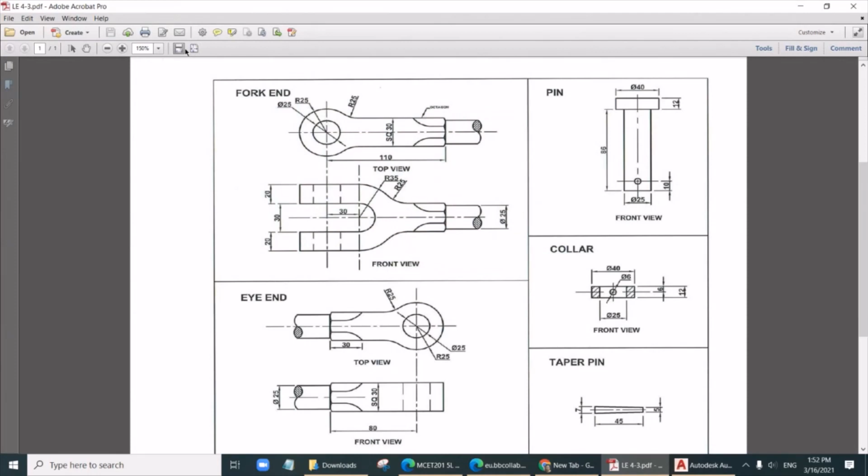And the outside one is radius 25. Then you can see this is going on up to 110 length. I will show here because maybe that is too small for you to see. 110 from this to this is 110. I will not draw that octagonal part, but just a rectangle for now.

So offset by 110 from this to here. And then this is 30. So offset by 15 from this line. 15, 15, total is 30.

And they said offset by 110. I didn't get it, it's up to here. This is 110, you can see. So I can draw this line. I can delete the construction line for now, or we can maybe keep it here. Fine, it's like this. Here is trim.

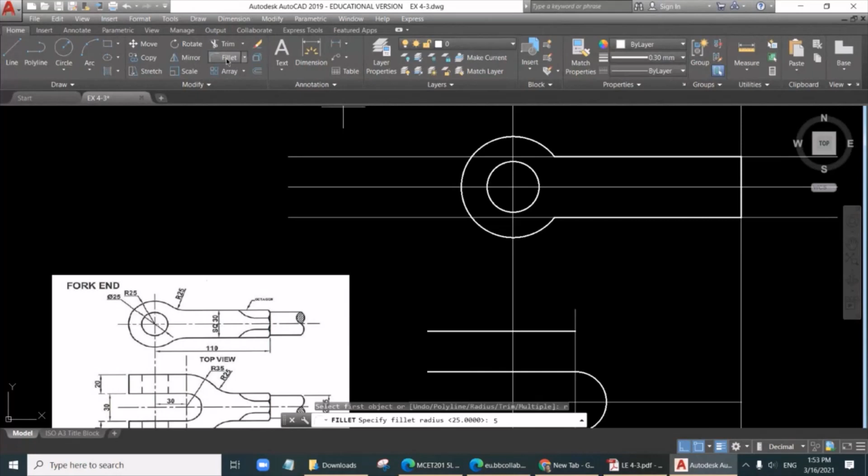Here is a fillet, R25, between this arc, this 25 line, here.

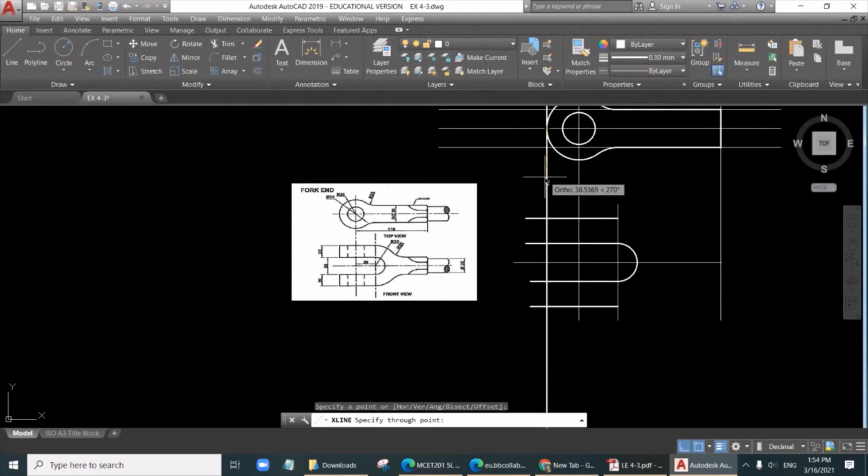Now, how long is this end here? It is coming from this circle, so I can get the construction line from this circle. You can see, so these lines, they are only up to here, only up to here. I'll delete this. You can trim again the excess length, this can be trimmed here.

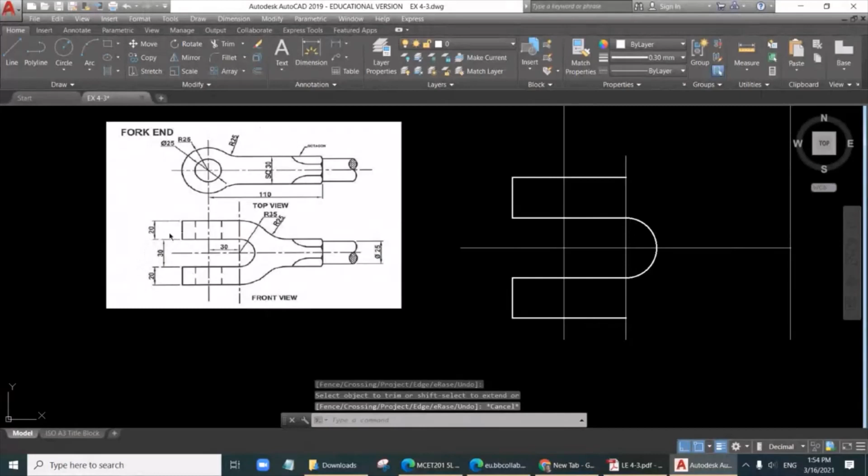Now the other remaining part here on this side, this is radius 35, the outer radius. So with the same circle, center radius, this center, this is radius up to here. Again trim it and delete this part of the line.

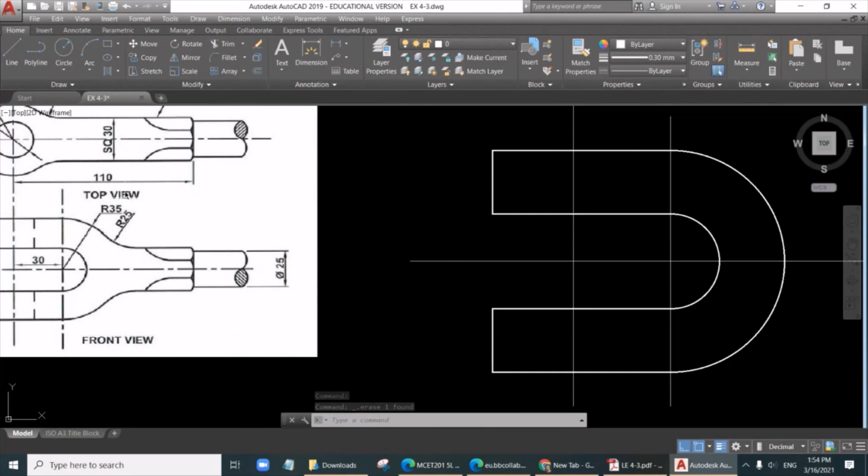It continues as a 30. This is square 30 and this is 30. Also here is 30. Okay, that is to be understood. So I'll say offset by 15 on each side from this line, 15, 15. So now you can draw a line from here to here to here to here and trim

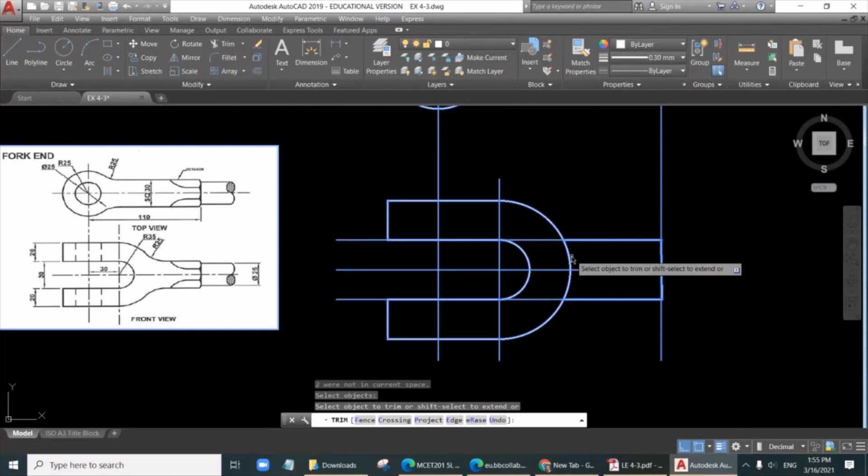this line here. I'm trimming it first. Oh, this line is not properly drawn. Let me do it again. Okay. This is okay. Fine. Okay.

This is fillet again, fillet R25 between this and this. Right click, repeat fillet down here. You can delete this. So you can see this is done.

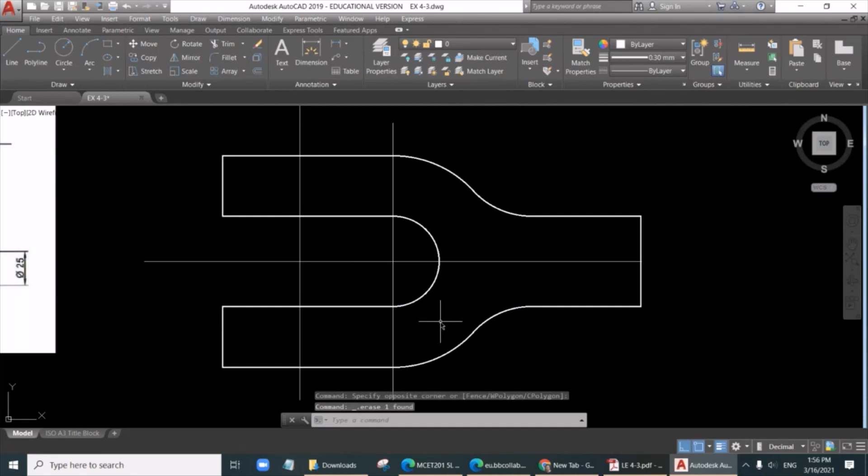Now this length, we can assume any suitable value for the length, but the diameter for that shaft is 25 diameter. So you can continue from here, say drawing the line, say the length is 30, any length, assuming, and diameter is 25, any each side 12.5

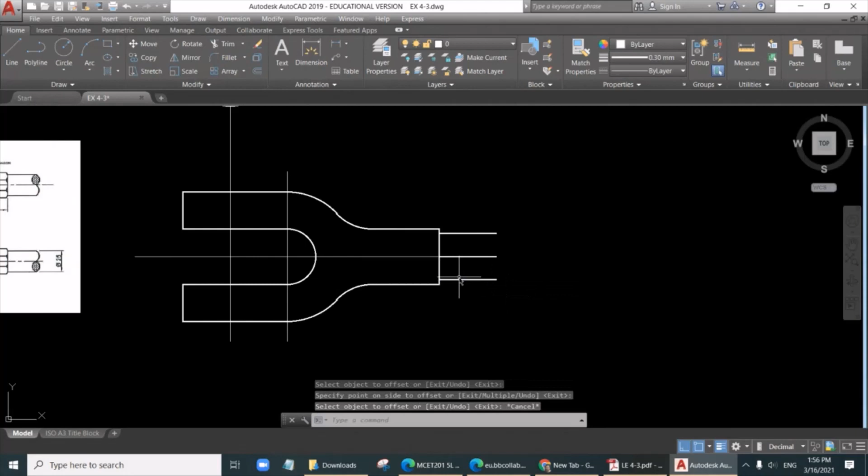offset from here. We get the shaft, and we want to draw the arc here like this. Switch off the ortho for a while. We have done it from week number 2.

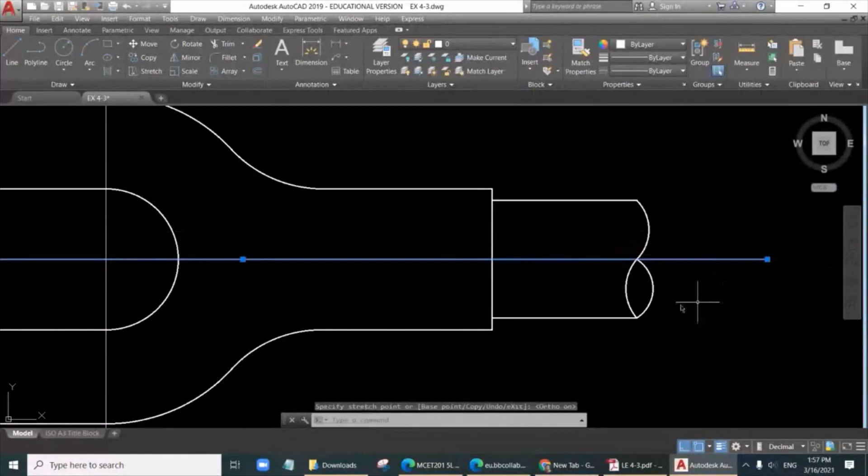Fine, this line can be deleted now. You can continue this. Okay, as a center line, ortho on. So when you extend the lines, ortho must be on.

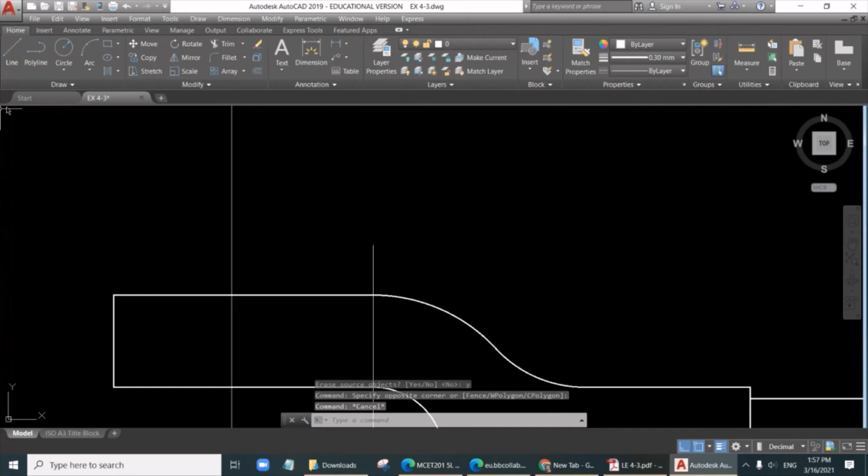I made it like this by mirror command, and I will need the line here. Sorry. To here.

Fine, this part is done. We will think about this octagonal part later on. No need to worry about this.

Now we'll put the fork end into this part. Sorry, the eye end into this.

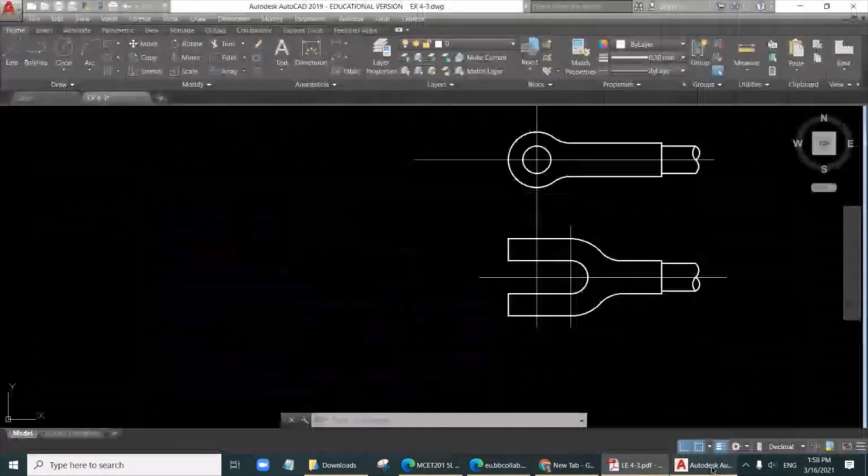Let me draw this part. This is 30 and 80 from the center. This is a main center. From this center it is 80. Offset 80 from here.

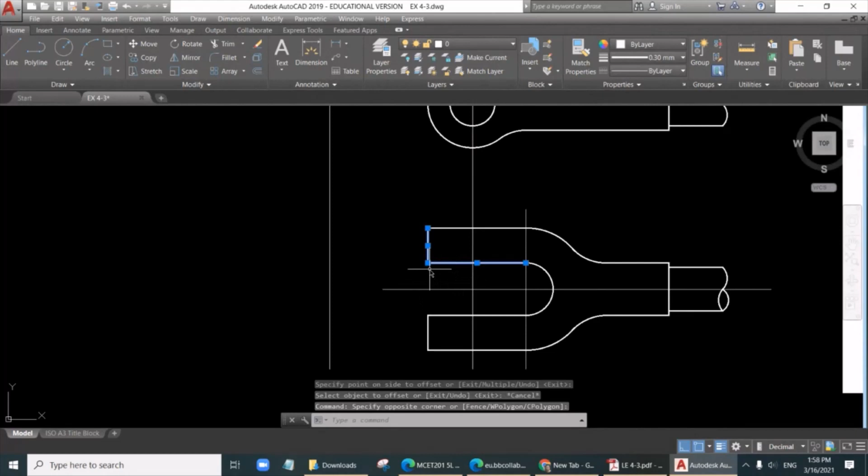This part, and you can actually extend the same line up to here, because it is the same size, 30. You don't have to draw another line, but either you trim it or extend it, or just pull the lines with ortho and Osnap on. It's up to here.

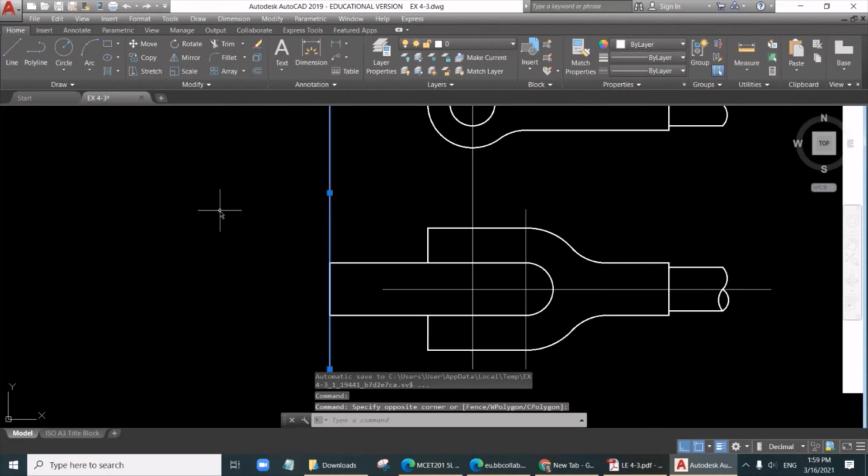Fine, now okay, we need it in the top view also. How much is it on this side from the center line? It is 25, radius 25, and this distance is 25 up to here.

So from this main center here, on the right hand side, 25. So yeah, it's up to here. Okay, sorry, set 25 here, up to here. You can delete this line now. It's up to here. Then we have this hidden line here for the pin, but we can directly draw the

pin there. Now same thing in the top view, the same part in the top view we have to draw.

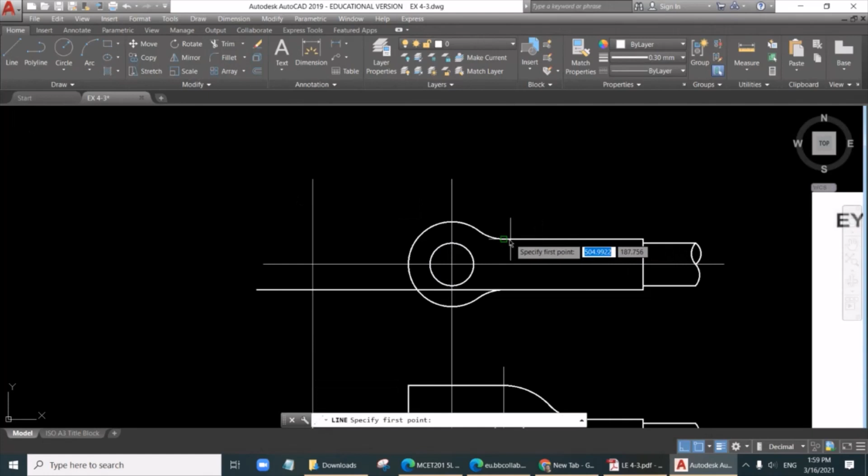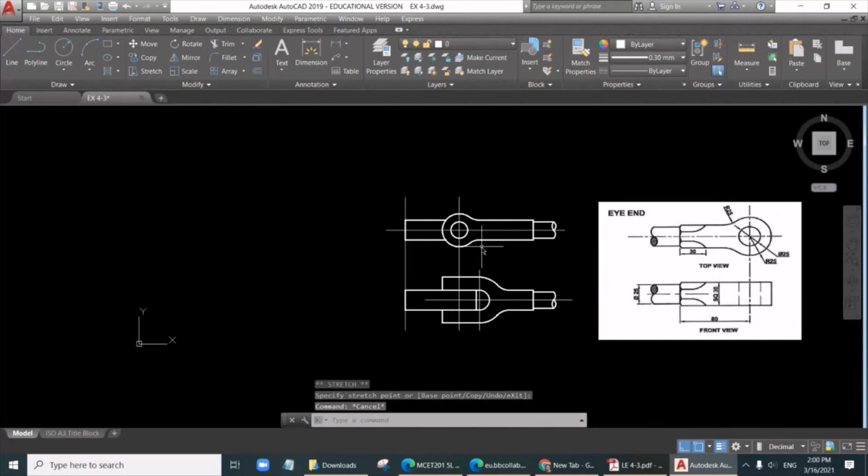So for that, I can draw a line from here. It's very simple, it's the same line because it's the same line, 30, it's up to here. I can draw the line and trim it or just pull it back here, and this also can go back here. It's on this side, and then there is another circle here.

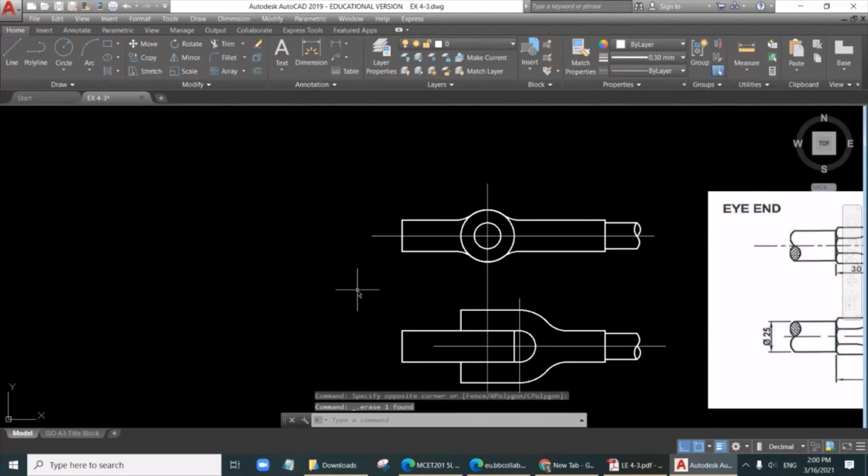Now I will make a fillet here, fillet R25 between this and this, repeat fillet between this and this. Well, this can be deleted now. We have this end.

Let's look at the main part drawing here. This part is section lines up in the front view, section lines up. So I can copy this, make a mirror, vertical mirror of this, instead of drawing it again.

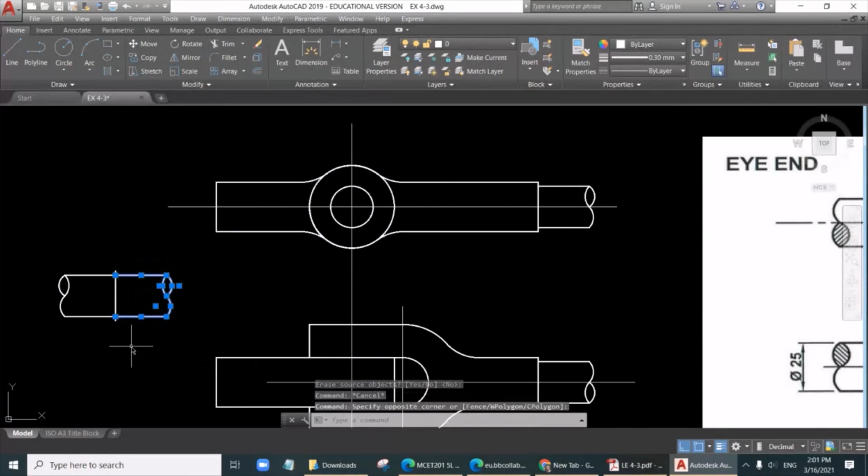And I said don't delete, so that was wrong. Then I make it move. Move it here. We have two lines. I'll delete one line.

Continuous center line up here. We can add the hatching lines by then. And whereas here, if you see in the top view, the lower part is having section lines. So the lower part is having section line in the top view.

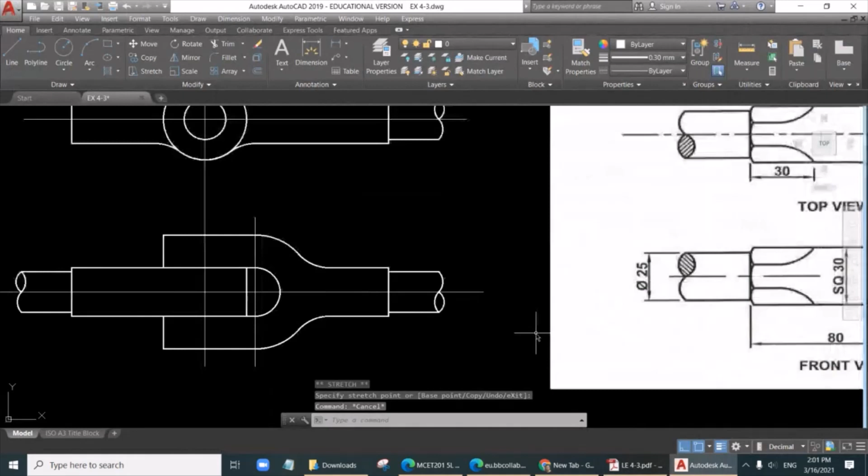So I can copy this one here for the top view, make it a mirror image of this, and say yes, delete the original part. Move it, keep it here. Fine, two lines.

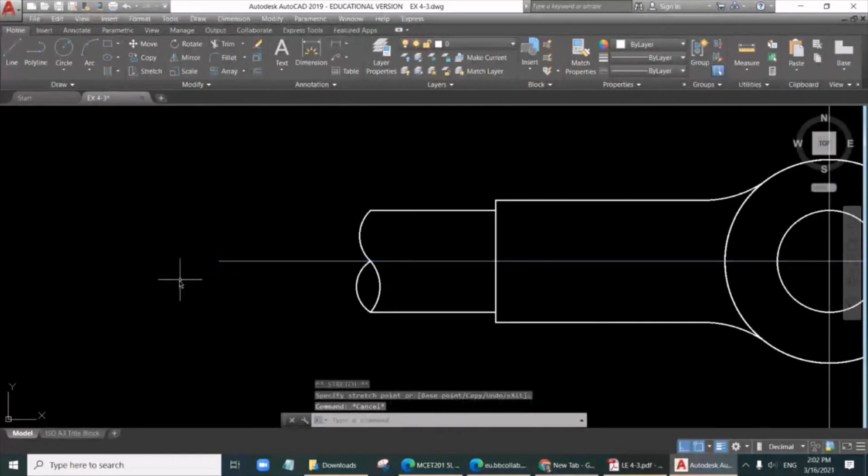Never keep double lines anywhere, because it leads to other errors. Fine, so that is done. The two parts are done, two parts are done so far. These are our center lines. We can make them center lines, these are the center lines.

We need a few more things here. Let's focus on the pin now. This is the pin which is going there. I'm not showing you the solution or the shape of this knuckle joint, because I said we need to draw the unknown part, as if we don't know this part, and draw it.

Okay, so this is diameter 25. That means this pin is going through this hole, so I'll draw that pin and it is resting here. Starting from here, 20 on this side, 12 going up, 40 like this, coming down by 12. This is the pin, and I can delete this line, no need. Fine, this is the head of the pin.

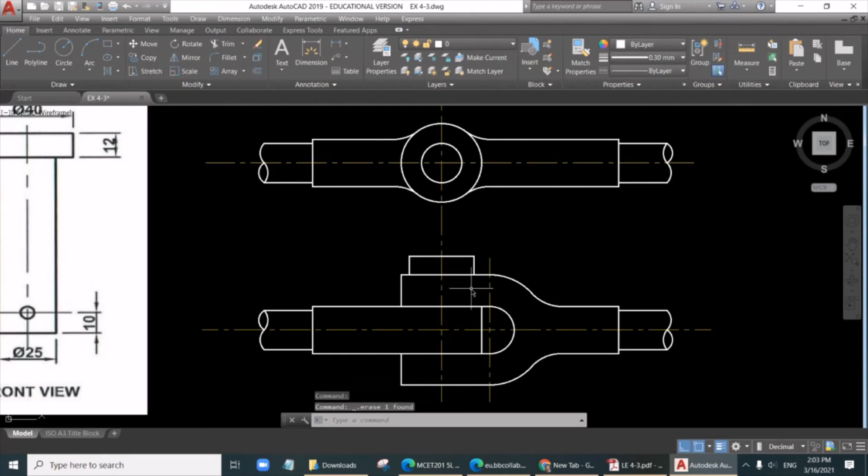40 by 12, this is 40, this is 12. And from the center, this is 86 - they are saying the length of the pin. From the center line, I will draw the line from here. 86 is the length of the line. This is 86, I draw the line.

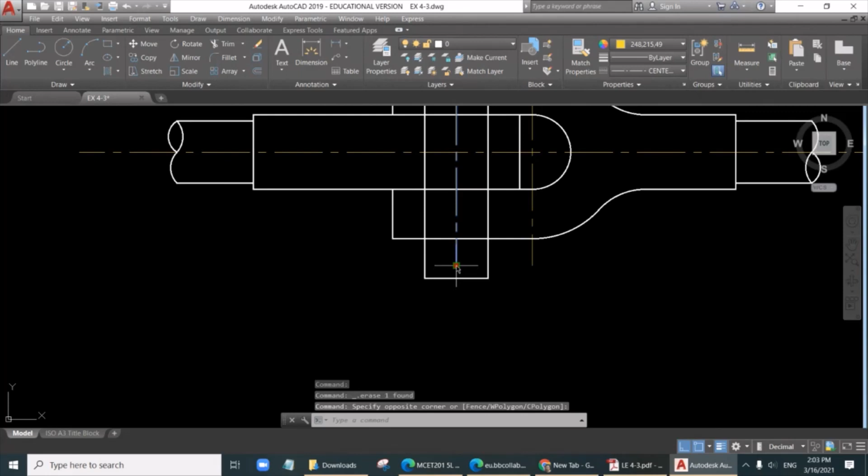Offset it by 12.5 - 25 is the diameter of the pin. So offset by, sorry, my number 2 key is not working properly, 12.5 from here, and the end of the line, end of the pin is here. This can be deleted, the center line can be extended. Now this pin has a hole, 10 from the bottom - offset by 10 from the bottom is here. This is the center of the hole.

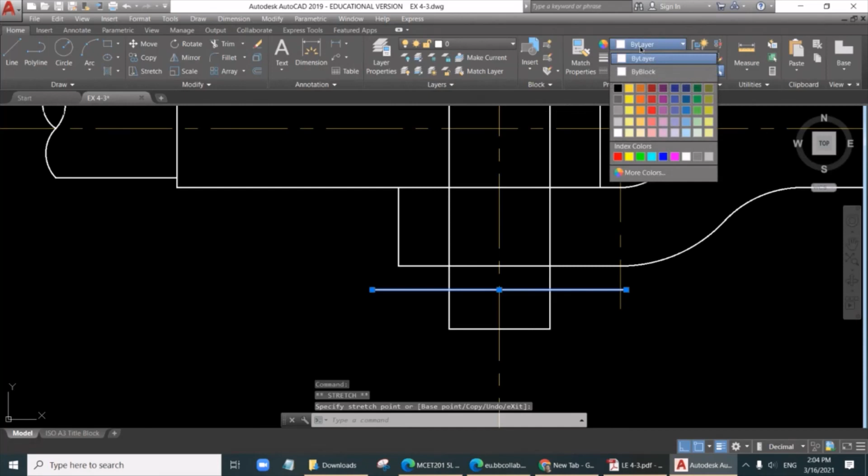This is the center line. I can reduce the length of this center line.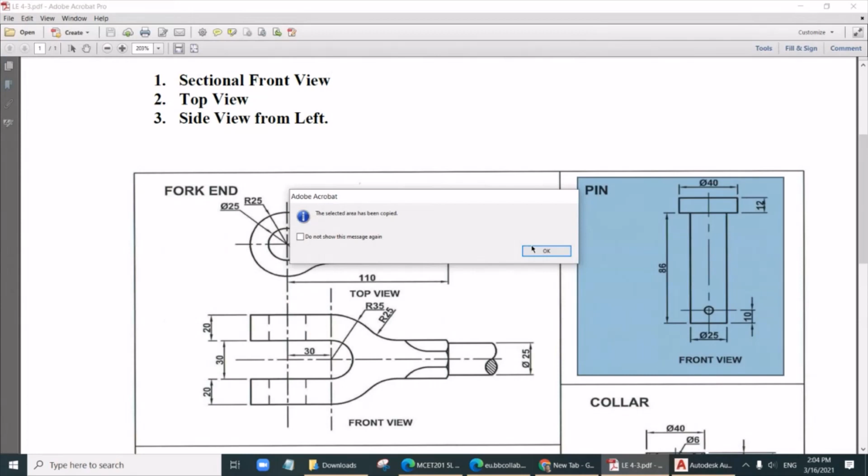They want us to draw a sectional front view, so this front view is a sectional. We want to see what is inside the part, and we will take a partial section here. So to draw the partial section - what is a partial section? We take the sectional view of only the area of the part we are interested to show the section lines. We don't section the full part, we don't cut the part fully, but we just want to see this pin in section.

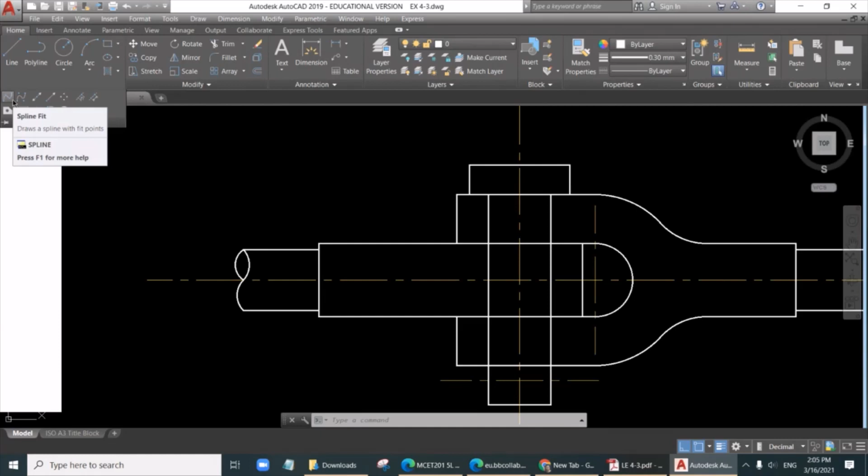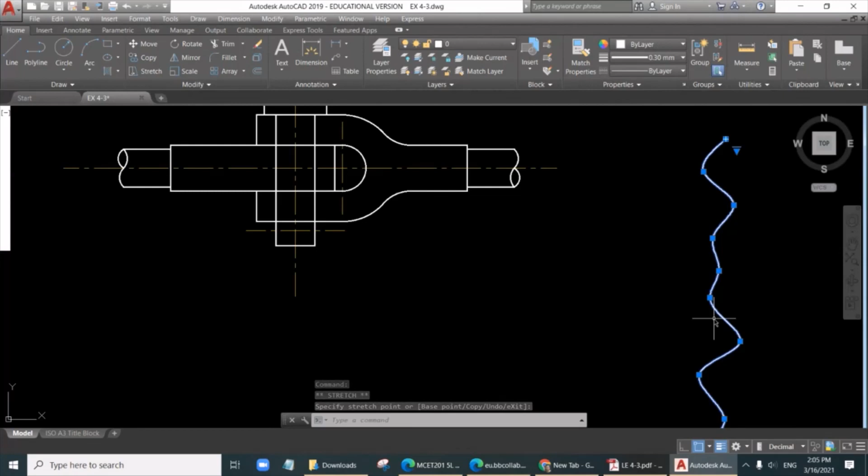So there is this spline command, spline fit - this is a spline, or the spline CV, it doesn't matter, spline command. What is it? You click here, you switch off the ortho for a while like this, you can define the shape of the spline by clicking wherever you want. Enter, enter, enter 3 times at the end to end the command. You can change the shape even later on if you don't like it. So we'll use this command, spline, to take the spline here, and maybe...

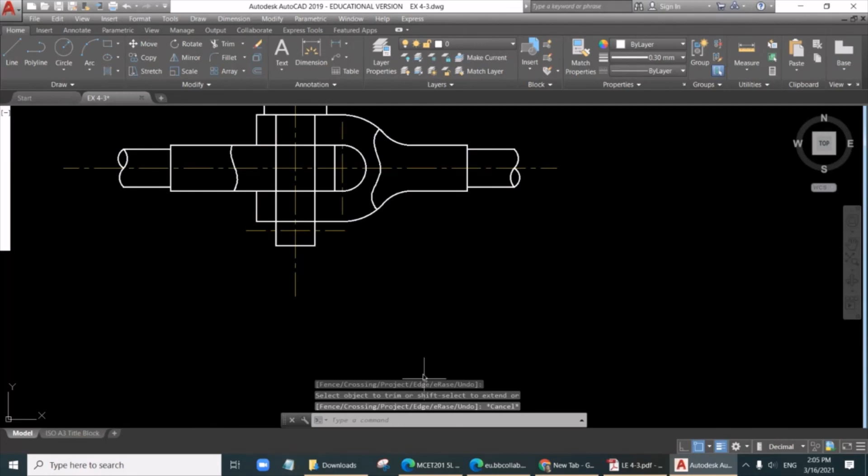Say somewhere here, okay, and I will trim that spline also. Trim. We are taking the partial sectional view here. So basically we want to take the sectional only in this area. So hatching lines ANSI31.

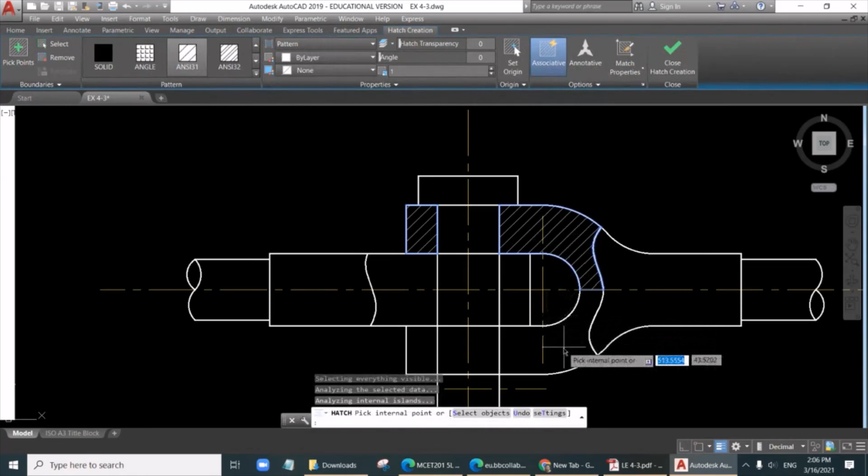Okay, let me go here, by layer, and maybe this hatching line here. This is one hatching line, and in this part another hatching line, but this hatching line should have a different angle because this is a different part.

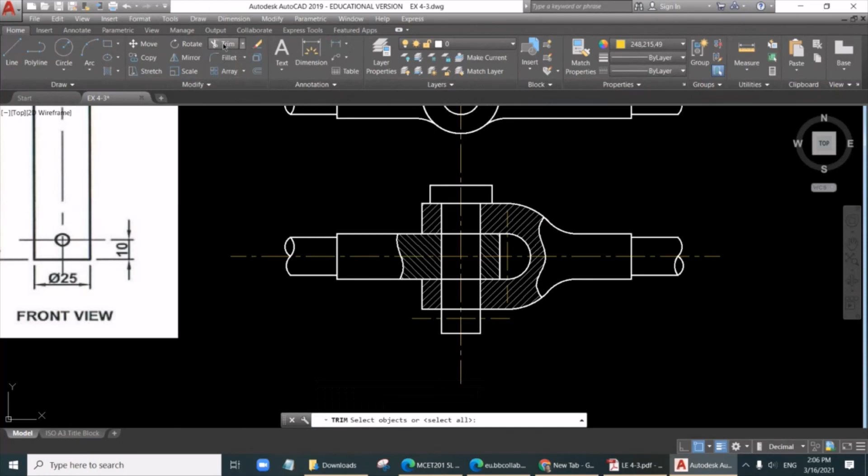We show the hatching line, but now because we are showing this pin in the section, now we are seeing the pin. We can see the pin now because of the hatching, so we have to trim certain lines here, like this line. These are just small modifications that will happen to the part because of the sectioning. You are taking the section, that means you are cutting the upper part, and now you can see the pin directly. You are seeing the pin directly here.

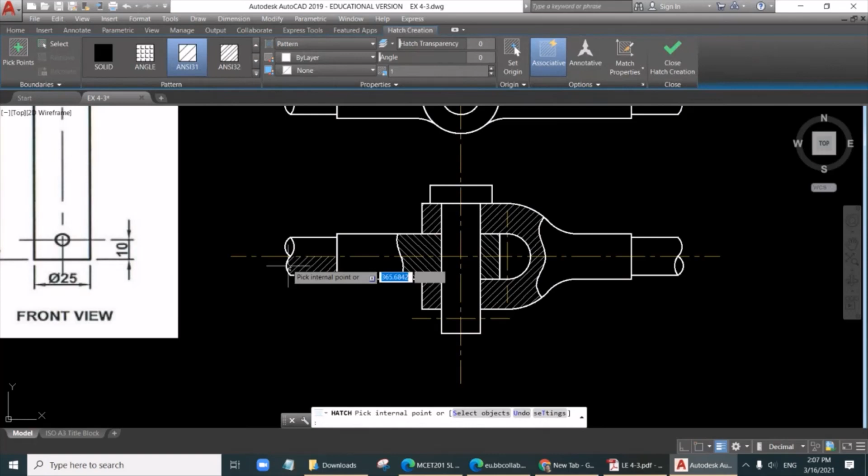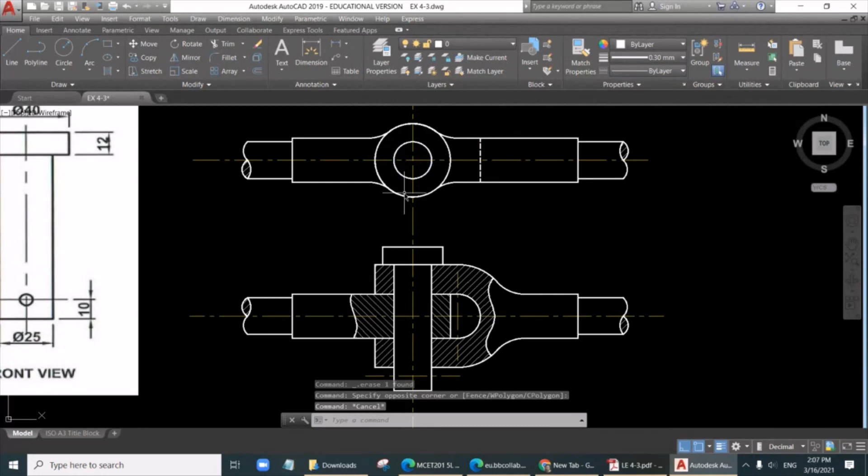That's it. Because we are in the hatching command, we can in this also. Okay, these are different parts, so they should have different hatching lines, but doesn't matter. Fine. So far top view, front view is done, but you can see here some modifications are needed for some additional details, like here in the top view there will be a hidden line here. For this surface or this part of the fork end, this will be a hidden line. Fine, we'll talk about this and the hexagonal part later on.

Now let's get the side view. What you see in the side view. Now before we go to the side view, let's understand. Intentionally I didn't do it before, the knuckle joint. You go to the images, just type knuckle joint, you understand what is the part. See, this is knuckle joint and it is a commonly used part. I hope we get a good image. I'm just doing a random search so that you get a better understanding.

See, this is a fork end. It looks like a fork end because in the top view it looks like an eye. You put this in here in this gap, put the pin, then put the collar and insert the taper pin. So if you see from the side view, you see the circle for the shaft, then you see the octagon, this is octagonal shape. Then this octagon merges, it becomes square here. You can see it is a square, 30 by 30 square here.

Also for this, it is a square in that area, a small neck area. After the octagon, it is also square. And then the height is remaining the same, 30, but the width is changing. Width is coming 25 radius for this and width is 50. So here 30 square and here 30 height, 50 width rectangle in the side view. Let's get here to start drawing the side view. I hope we got a fair idea about the shape now, the shape which we are drawing.

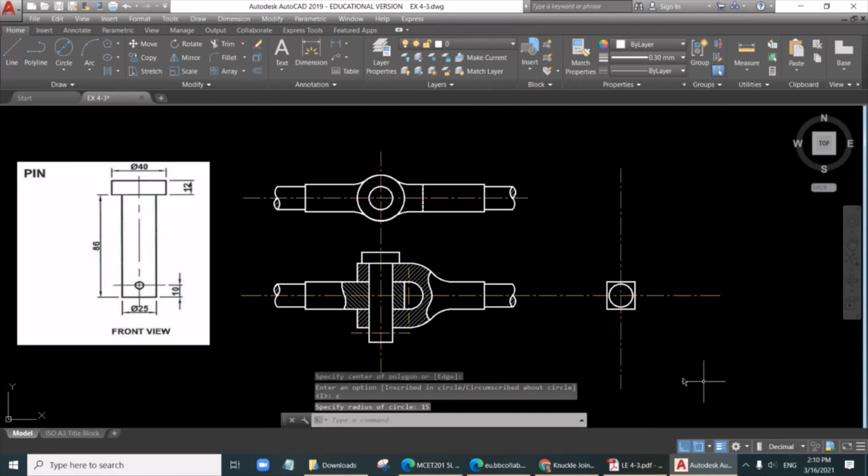Okay, I'll delete this and copy paste the center line. I said we have this diameter first, diameter 25 shaft. And then we have this one, this is a square. So you can use polygon, number of sides is 4, center of the polygon, C, 15 radius. This is a square, 30 by 30 square. You can see this is a 25 diameter, 30 by 30 square.

This square also has an octagon in the same place. So you can use the polygon command again, number of sides 8, specify the center for the octagon, C, 15 radius. This is a square. You can see from the same square you cut the corners to become octagon. Because you are cutting 4 corners of the square shape, you get an octagonal shape. It becomes octagonal. This is done.

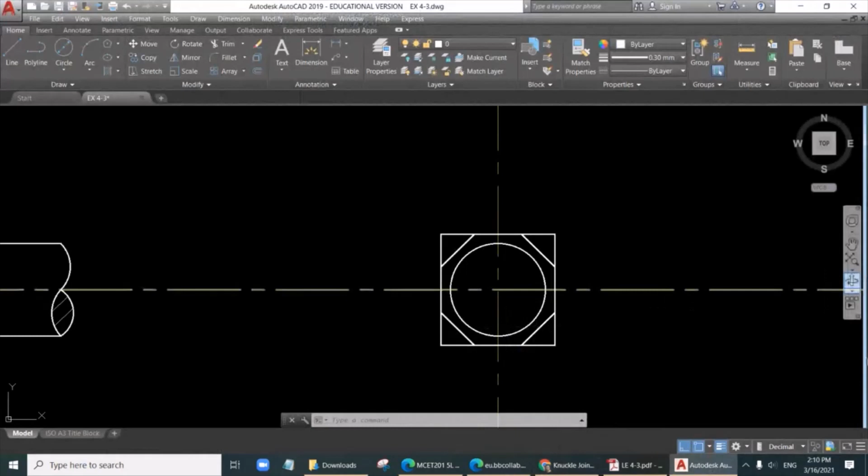But in this area, this same eye end is increasing in the width. You can see again, I will go back to this. This here is increasing in the width. How much is the width? Radius 25 on one side, so radius 25 on the other side, that is 50 width. So I will draw the line directly from here. Okay, anywhere you can draw, starting from the middle. 50. This is line 50.

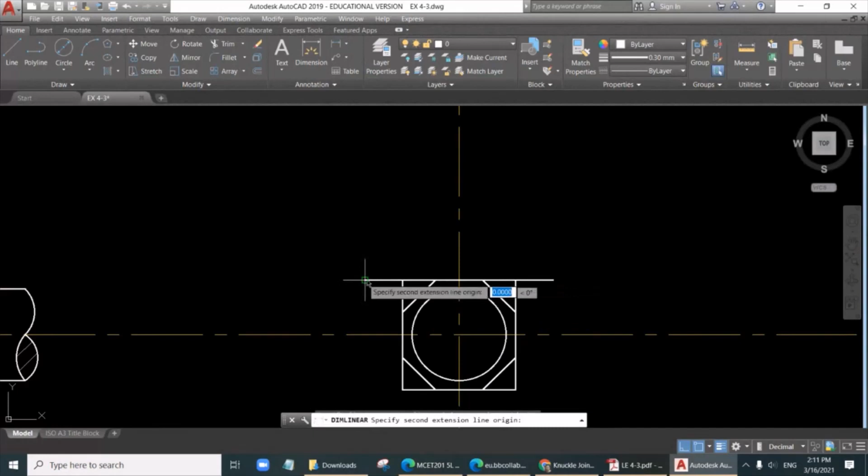Then I go to the center, check the dimension again. This is 50 because 25 is radius on one side. You can see here, this is coming from the top view. This is coming from here. So this size is 25, that's why the diameter 50. Fine. So offset this by 30 to get the line down here. Offset this by 20 up from here and 20 down from here. This is 20. Okay, I think it is not 20.

Offset by 20 from here. So now I can draw the line. Now this part is the eye end. This 20 is for this part, 20 up here, from here and here.

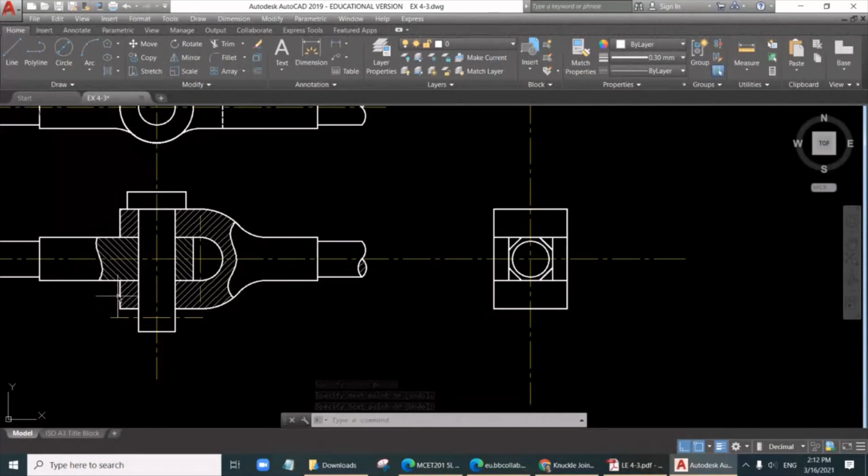This also is having the same width. You can see here both circles are matching, so it also is having the same width, 50 for this fork end. And then we can put the pin here, this pin. It's not selected well.

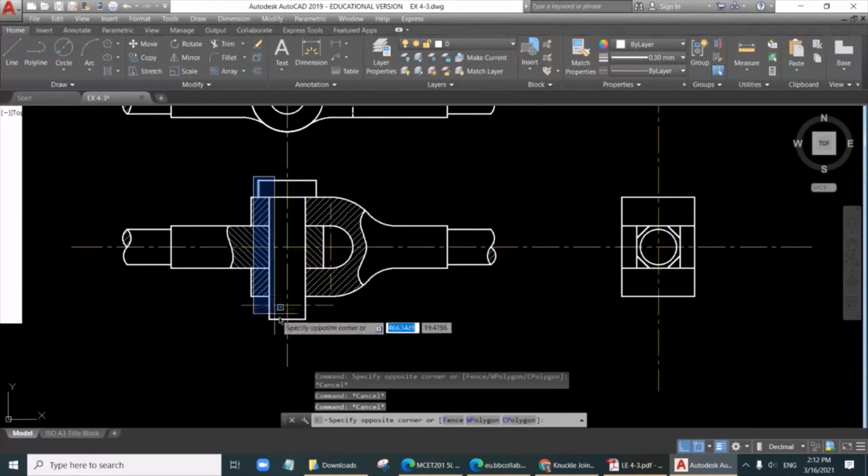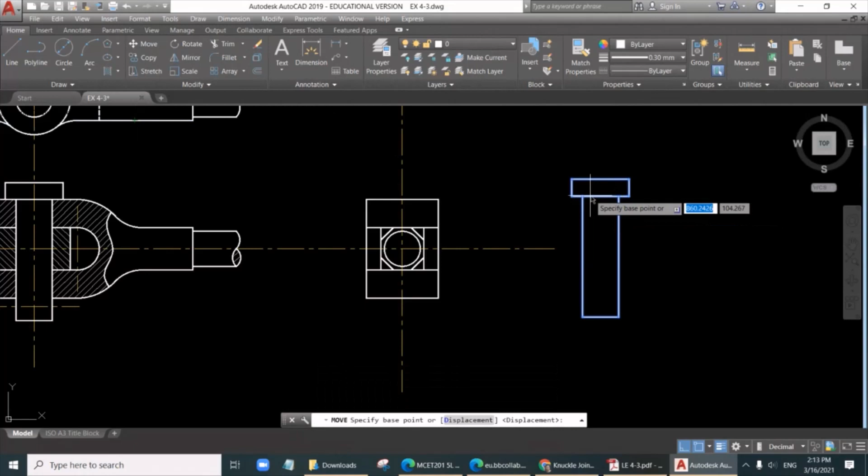Copy paste. I'll put this pin here because I need some reference point for the move command. So I will move this, move the midpoint here to this mid, not correct. Move the midpoint to midpoint here. Fine.

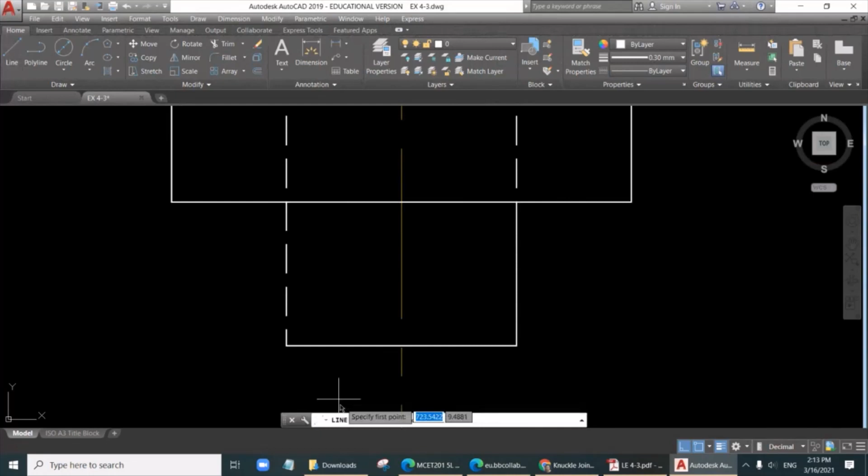Side view. So the pin here inside will be hidden. This pin inside here should be hidden. But the outside part of the pin can be visible. So you can draw a visible line here. This is coming out. So for now, we'll draw a visible line.

And again, we don't want line over line. If it is there, it also doesn't matter. Fine. Outside is visible. Inside is hidden. This is a pin. Now almost everything is done. Let's focus on the two small parts here now.

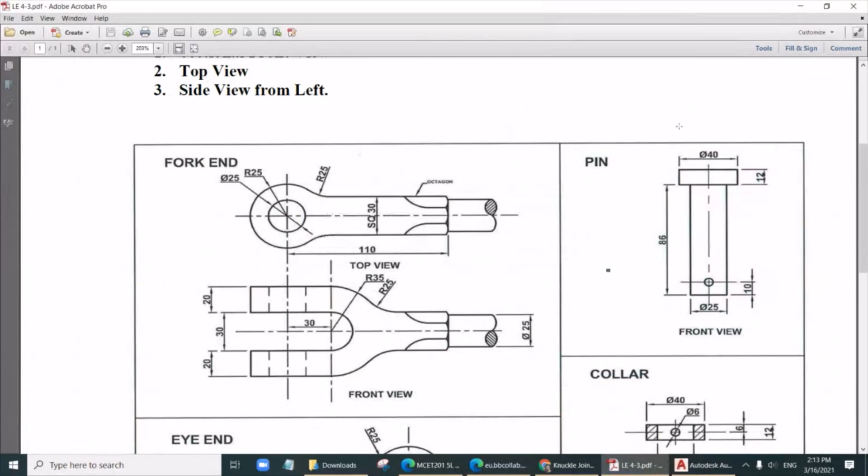This collar is the same dimension as this head of the pin, 40 by 12. You can see the collar again here. This is a collar, same like here. Dimensions are the same for us. This collar we have to put. We have to match the center of the collar with this center. Fine. So if I want to draw the collar here,

you'll see that 40 diameter. Fine. Let me just draw the line 40 here. This is a collar. Go to the middle, offset by 6. Actually, the upper line is not needed because the total size is 12. Fine. This will be deleted. And this is the collar here. Sorry.

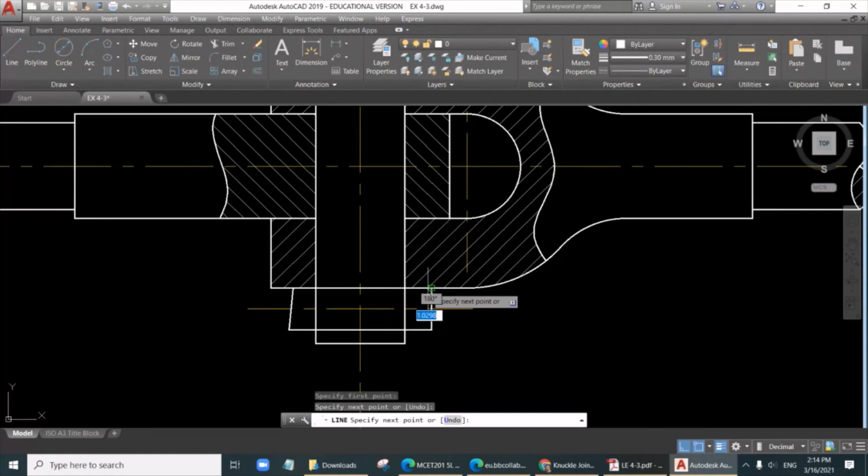Same. You can draw the collar here. I can directly make offset by 12 from this. Sorry, 12 means offset by 12. Here, and this should be 40. This total is 50 now. I want to make it 40. Keep that line. Delete this line. This is a line of 40 size.

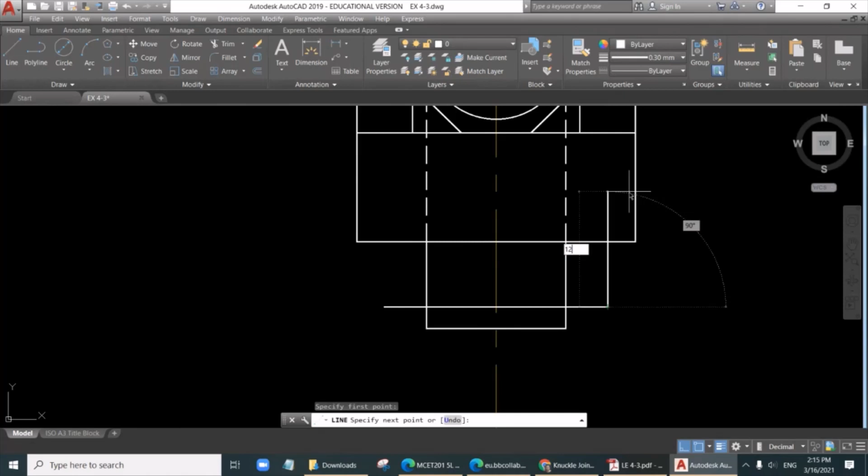Get back here. Draw the line from here up by 12. From here up by 12. Fine. This collar is done. You have this center line. You can bring the center line here. The collar also is done because this is a sectional view and we have this center diameter here. They are saying it is 6 diameter.

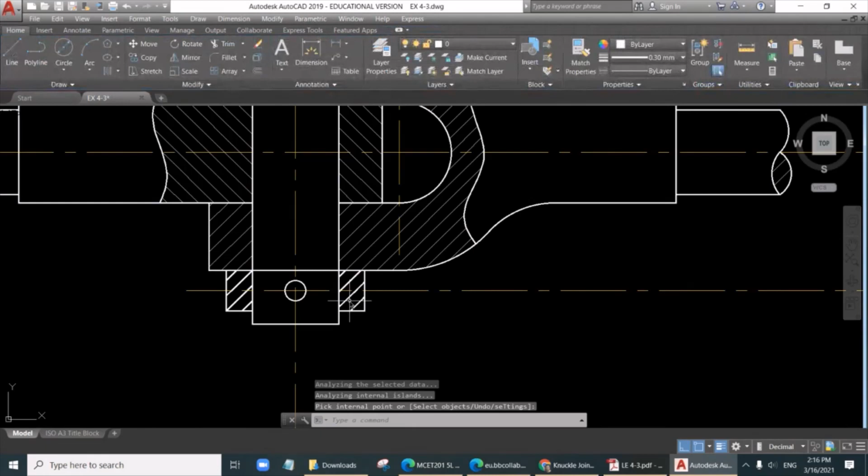Okay, and we are taking this as a sectional view, so we have to again trim this line. Trim this line here for the collar because it is a sectional view and it is not trimmed. Pull it back and add the section lines here. And this should be another angle. You can also change the scale.

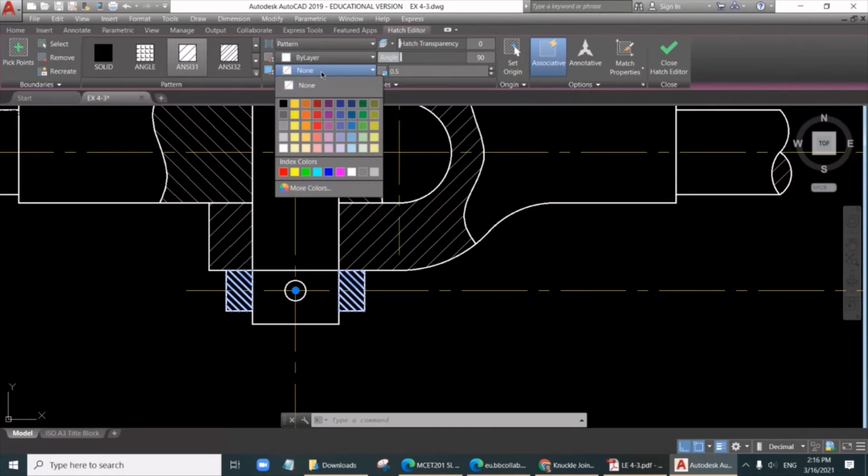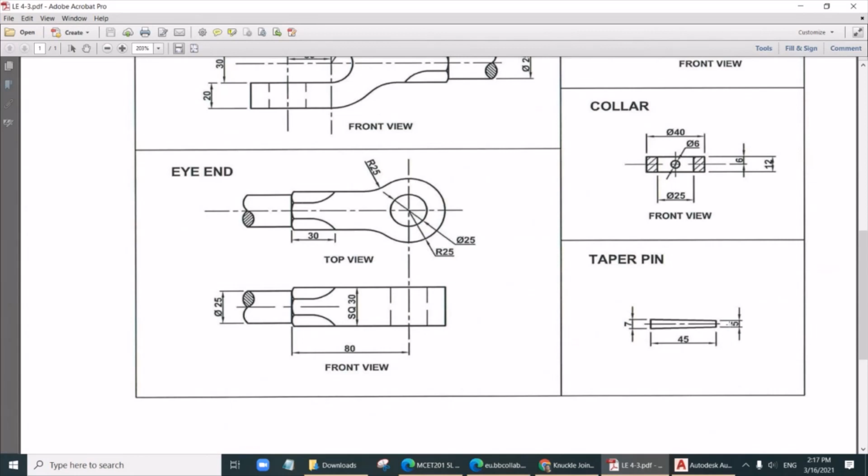Fine. Now we'll talk about this small pin. Taper pin, you can see this is diameter 6 here, and this is a taper pin, diameter 7 here, diameter 5 here, length is 45. Cylindrical taper pin like a white chalk. Tapered pin, 7 here, 45 length, 5 here. You can easily construct it first and then put it where you want to put it.

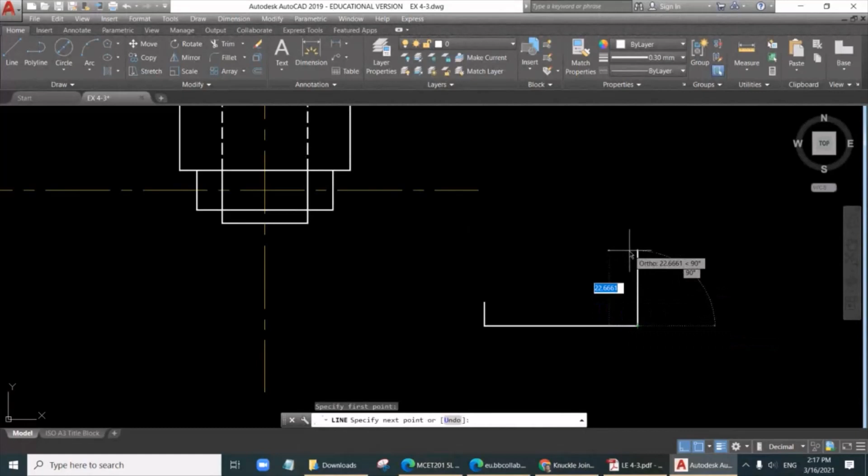I'll draw this just 45 length like this. Then from this, I'll draw a short line of 7 length, another short line of length 5, then bring the center to here, bring the center of this one to here, draw the line from this to this.

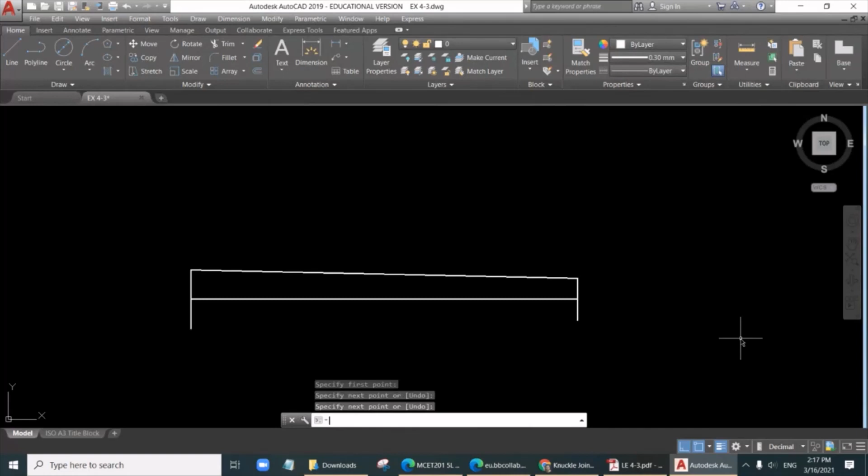Hello, engineer. Yeah, I'm in the class, so can we talk later? Okay, when I finish, I will call you back.

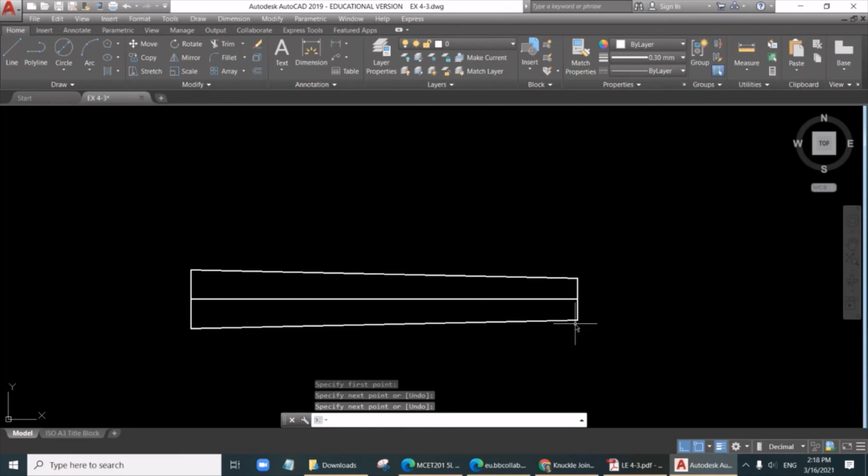Well, so now this is a pin which we have drawn. Now this pin, I will put it here in that hole. Okay, so let's understand something. This hole position here is like this, from the front view you can see. So the pin is like this. If you see from the side, the pin looks like a rectangle. And if you see from the front view, the pin looks like a circle. Understand that. Same position we will follow.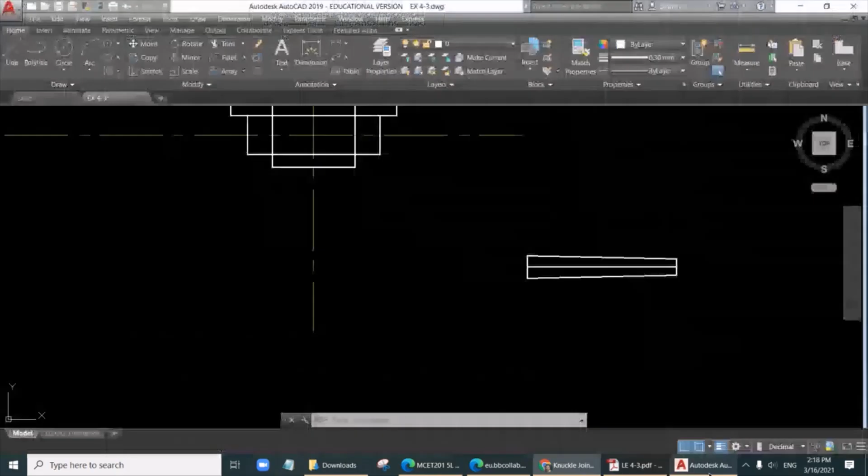It can be changed because it is an interchangeable position. Logically it won't be any mistake, but we will draw the same thing. So I'll put the pin here. We put the pin here, that means here it is only a circle. If you see from the front, here it is like a side, from the side. Again, the pin inside the collar will be hidden.

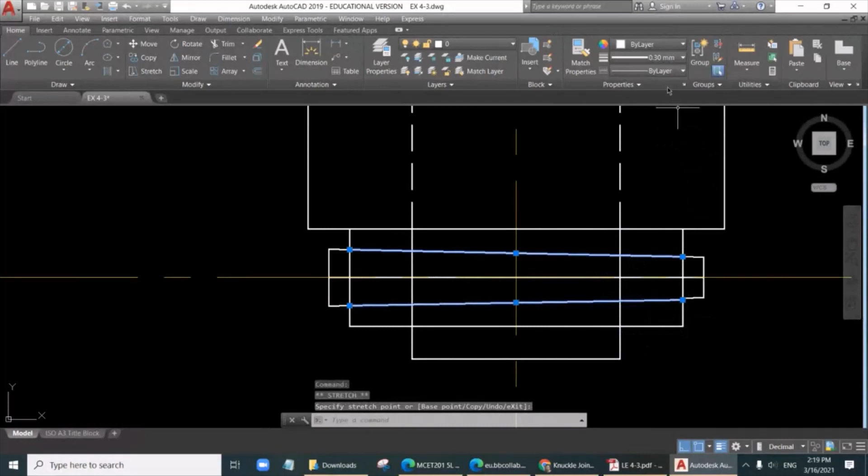So I just cut it into two items or two elements, and then I can make this here to here, and you can see here the same part, but the only thing I want is to make the inside one a hidden line. This is a hidden line. This pin now, even here inside, you can see in the collar also, before I just put something logical, here also this is hidden. This pin inside the collar is hidden. So this hidden line can continue up to here now.

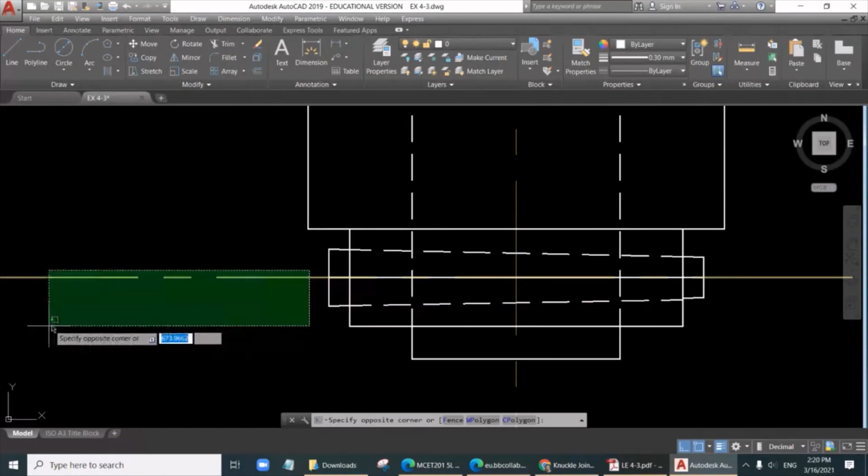Right. So outside is visible. This is a collar, this is a pin inside. You can delete this line. Okay, keep it for now. Keep it for now, I guess. This pin, I'll put it here, a copy of the pin. You can delete this. This pin you also need here in the top view, right? Same way. So I'll rotate the pin, rotate by 90°, then move the pin

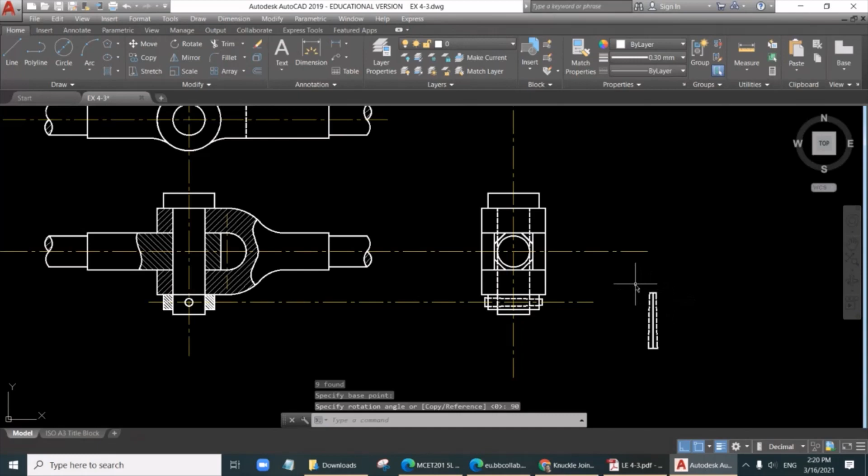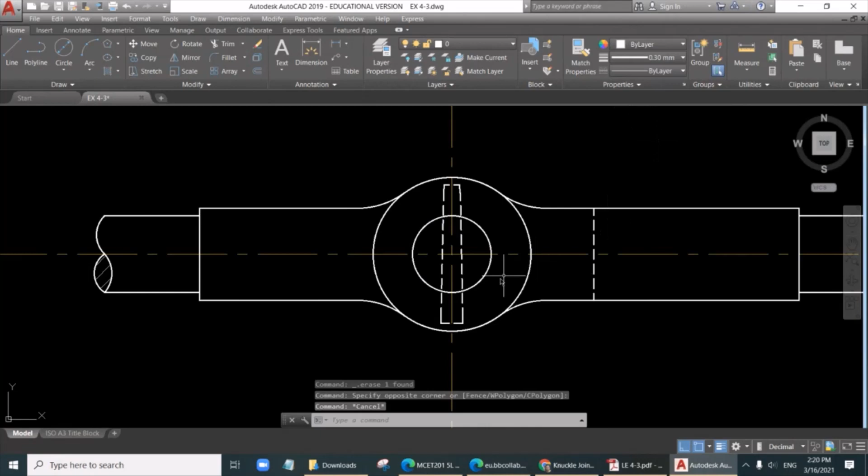here. And now in this case, the whole pin is hidden. In the top view, the whole pin is hidden. I convert all the lines together. It doesn't make much difference. Even this circle here is hidden because it is a hidden hole. What you see now in the top view is this 40 diameter circle, from this center, diameter 40. This is a visible circle. This hole is hidden. The pin is hidden. Here everything is done.

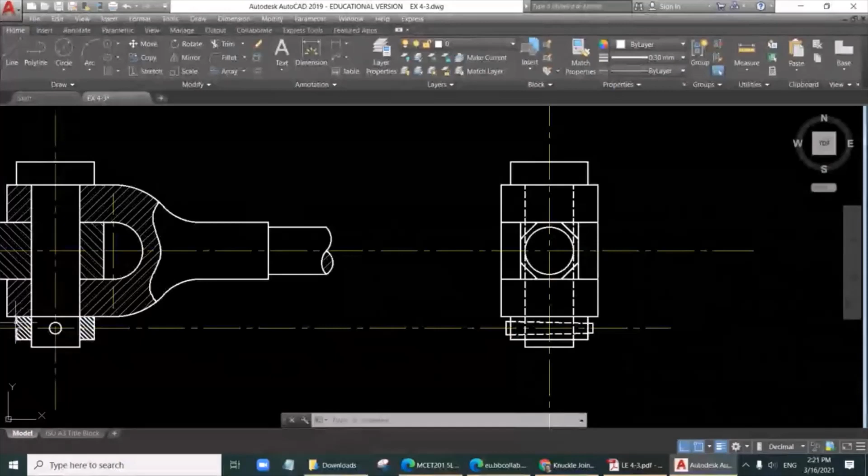Only one part is remaining, that is the construction of the octagonal shape here. They are not giving how much is the length of this part. Yeah, it is specified here 30, and here not specified. We assume 30 only. But how much is the arc size? So how to draw that part? It will be done from the side view, because to draw that, first we need to complete the side view. We got the side view now. We can draw that part because it is coming from the projection of the octagon.

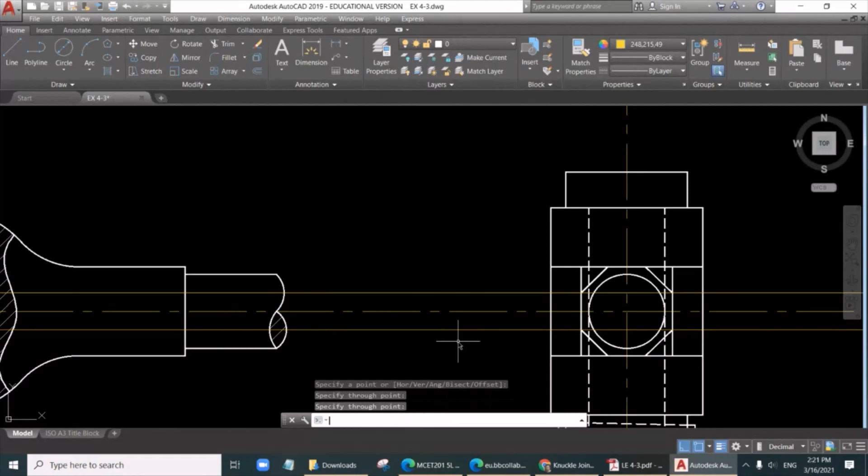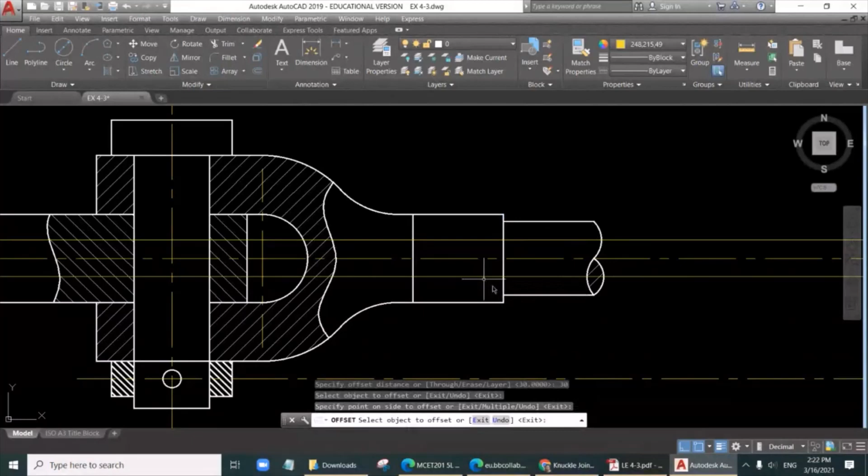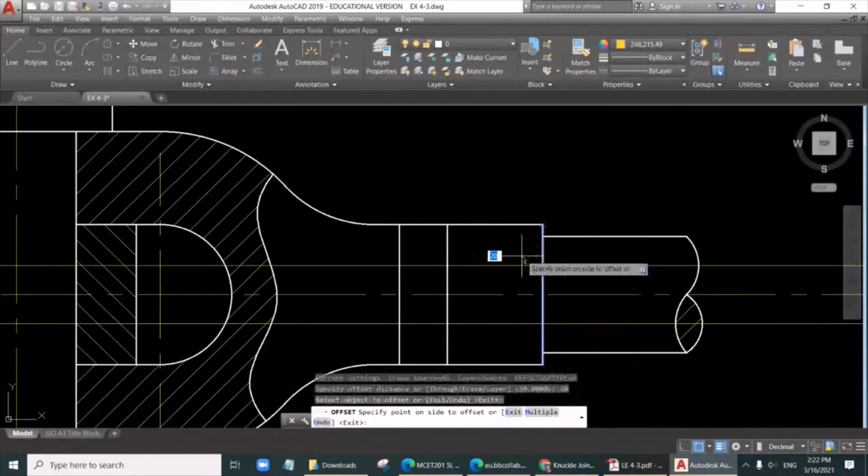It is from here. 30 size. Okay, offset by 30 from this. No, 30 is not entered, I guess. Offset by 30. I will just show one, and you can just copy and paste it to other places. How much it is straight, how much it is curved, is also not known. So I'll just draw a freehand arc starting from here to somewhere here. I will make it an offset of 20 from here, approximately. So I am assuming up to 20 it is straight, and then it is an arc.

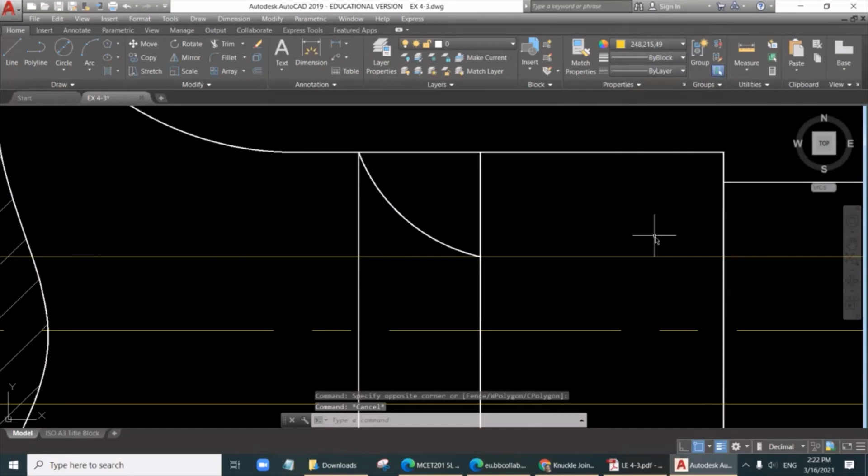Also, how much is this? This is the space which we draw by a 30-degree angle. We don't have to draw a 30-degree angle. You can assume a suitable value, say 1.5 millimeters from here. Okay, assume it. Even if you don't draw this, it is okay. This one here, same thing, you can mirror it. Mirror this arc. Also draw this arc here, the middle one.

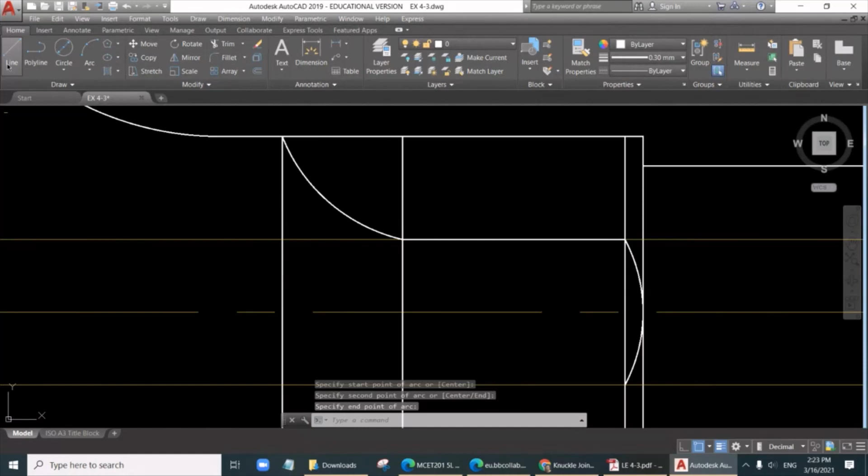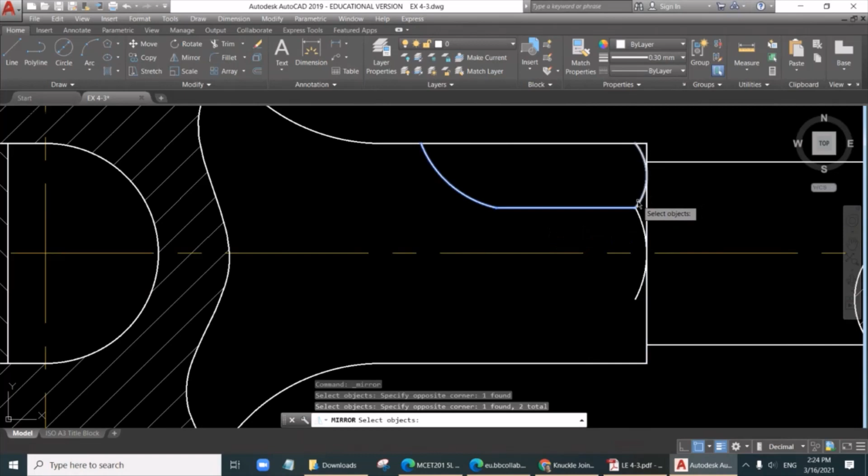Here I need one arc, so I'll draw a short line here first. It is like the hexagonal head we constructed for the bolt. Similar to that one, but this is octagonal headed. Fine. This line can be deleted. This can be deleted. This is a construction line only. I will repeat this mirror, this one and this one, as a mirror line using the center of this here. You get it? You can repeat it on the other side for the mirror, and that's enough.